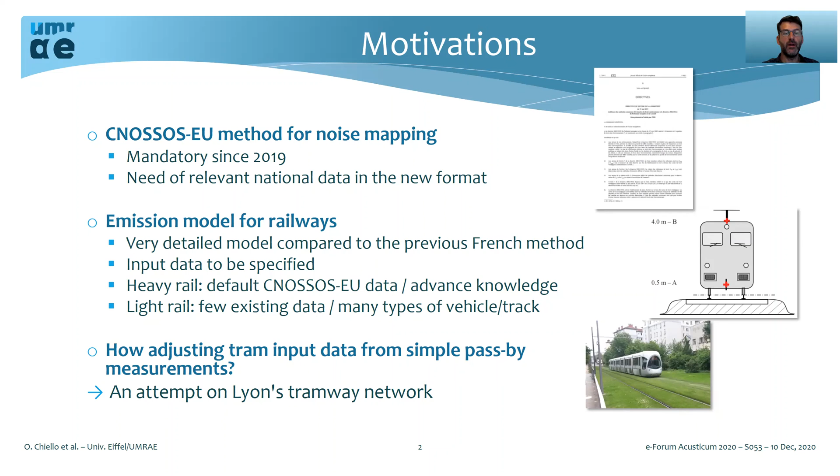The aim of this work is to propose and test a simple method to adjust CNOSSOS input data for tramways based on available pass-by measurements of commercial service vehicles. This first test was carried out on the Lyon tramway network in France.

I will begin my presentation by reminding you of the principles of the CNOSSOS emission model for rail. I will also talk about the available measurements which are used in this test to identify the CNOSSOS input data. I will then detail the proposed identification methods, namely the emission and propagation models used to calculate the pass-by indicators, and the inverse method itself. Finally, I will present the results obtained and the main conclusion.

The first characteristic of the CNOSSOS emission model is its multi-source aspect. Rolling noise, traction noise, and aerodynamic noise are differentiated. Traction noise and aerodynamic noise are characterized by sound power spectra with explicit speed variation: constant for traction noise and proportional to the speed logarithm for aerodynamic noise. Rolling noise is taken into account in more detail, as we'll see later.

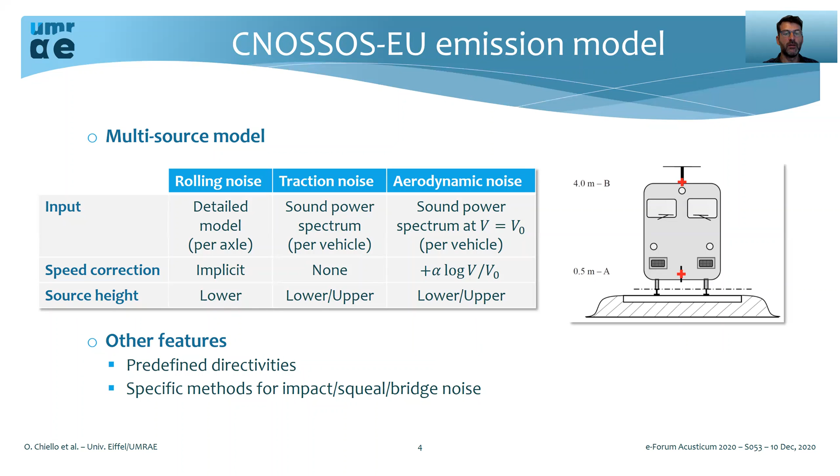The sound powers are then distributed over a homogeneous traffic section at two predefined heights of 0.5 and 4 meters, the distribution depending on the type of the source. The sources also have predefined directivities, and other types of noise can be taken into account in certain situations, such as bridge noise, impact noise, and squeal noise.

Rolling noise is taken into account in a more physical way, as shown in this diagram. A distinction is made between the excitation parameters, namely the wheel and rail roughness spectra as a function of wavelength, and the parameters representing the vibroacoustic efficiency of the structures, namely the vehicle and track transfer functions. These four main input data are necessary to calculate the total power of the rolling noise. It should also be noted that the variation in speed obtained is implicit and is related to the conversion of the wheel-rail roughness spectra, expressed in wavelengths, into frequency spectra.

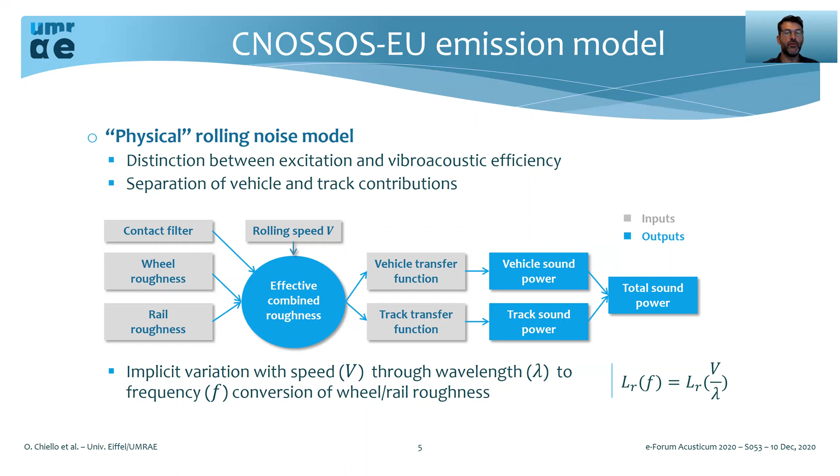The acoustic measurements used for our identification were carried out 2 years ago by the association Acoucité, which is in charge of producing noise maps for Greater Lyon. Pass-by sound levels were measured in accordance with ISO standard on 4 track sections, using 2 microphones placed at 2 different heights. As you can see, the 4 tracks are quite different, whether in terms of rails, supports, or coverings.

The measurements were performed on 2 different types of tramway running at various speeds for a total of about 60 pass-bys. In addition to the acoustic measurements, we were also able to measure rail roughness on the 4 track sections tested, as well as wheel roughness on a small sample of rolling stock. Only the results corresponding to one type of tramway are presented today, which represents about 20 pass-bys.

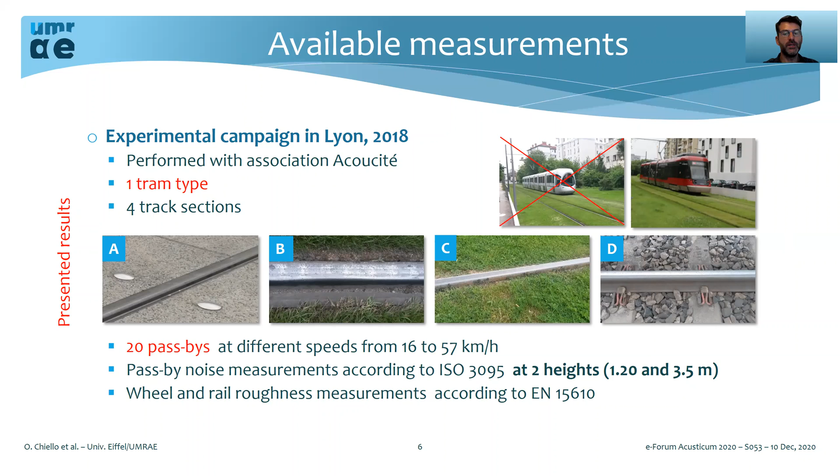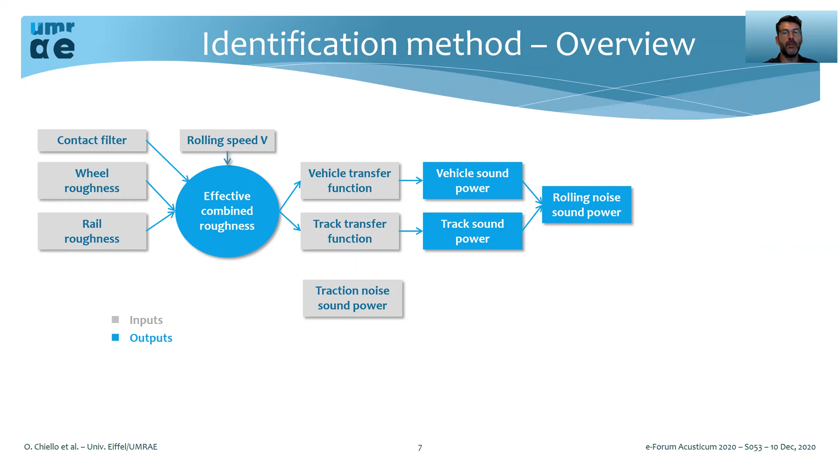The model used for the identification includes an emission part incorporating the CNOSSOS methods for the calculation of the sound powers corresponding to the rolling noise and the traction noise. The directivities and the heights of the sources predefined in CNOSSOS are used. We have also added some information about the longitudinal position of the sources on the train set. The propagation part consists in calculating the different attenuations in order to determine the sound pressure level at the receiving point. The pass-by sound level is then determined by summing the contribution of the sources and integrating over the tram during pass-by.

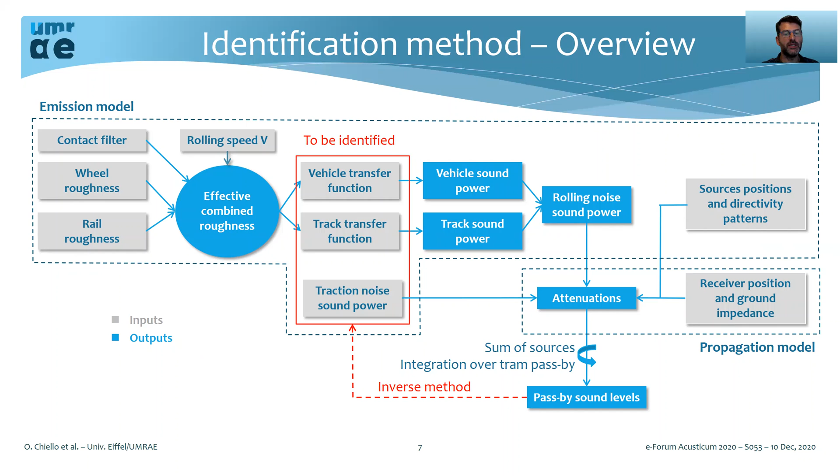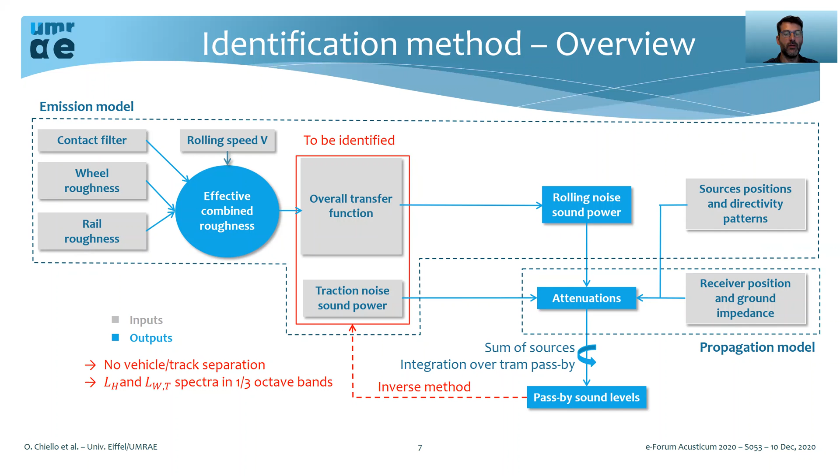An inversion of the model is finally performed to identify the unknown parameters from available measurements. In this first stage, vehicle-track separation is not intended, and one overall transfer function is to be identified. It should also be pointed out that the whole method is carried out in frequency bands so that the two input parameters are spectral.

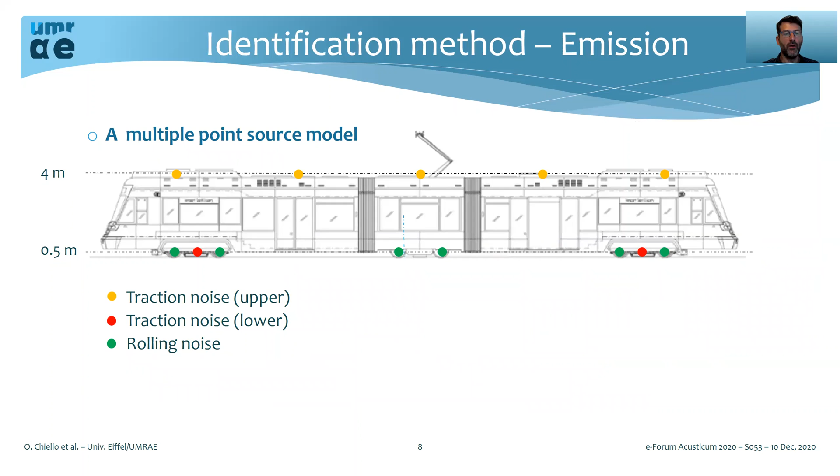So the emission model consists of a set of point sources placed on the train sets as follows. For traction noise, upper sources are uniformly distributed along the train set and lower sources are placed on the motorized bogies. For rolling noise, only lower sources are placed at the wheel sets.

The total sound power level in red, corresponding to the traction noise, is equally distributed between the upper and lower sources and between each source at the same height. The sound power level of each rolling noise source is calculated from the overall transfer function in red and the effective combined wheel rail roughness level, which is determined from the measured roughness level and the contact filter in accordance with the CNOSSOS method. The two parameters in red are to be identified.

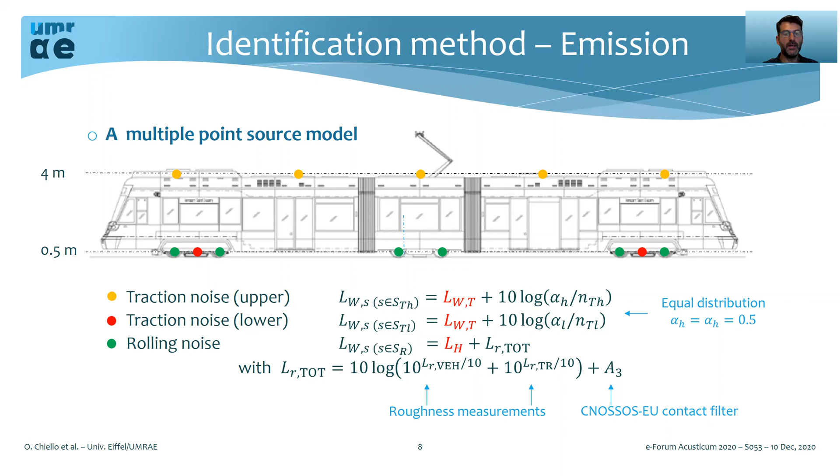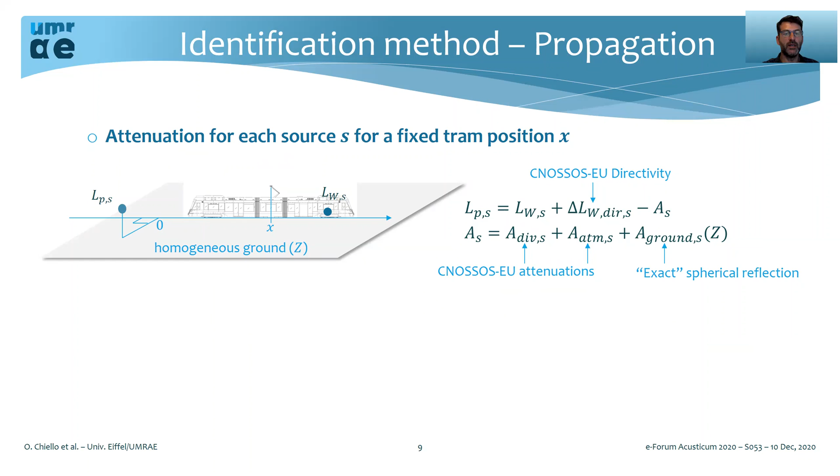The propagation model first consists in calculating for each source and for each position of the train set the sound pressure level at the receiving point from the sound power level of the source, its directivity, and an attenuation term. This term includes the attenuation due to geometrical divergence, the attenuation due to atmospheric absorption, and the attenuation due to ground effect. The first two terms are calculated according to the CNOSSOS method, but the attenuation due to the ground effect is calculated more precisely from the spherical reflection coefficient and the ground impedance. The choice is linked to the fact that we are interested in receiving points relatively close to the sources with homogeneous ground.

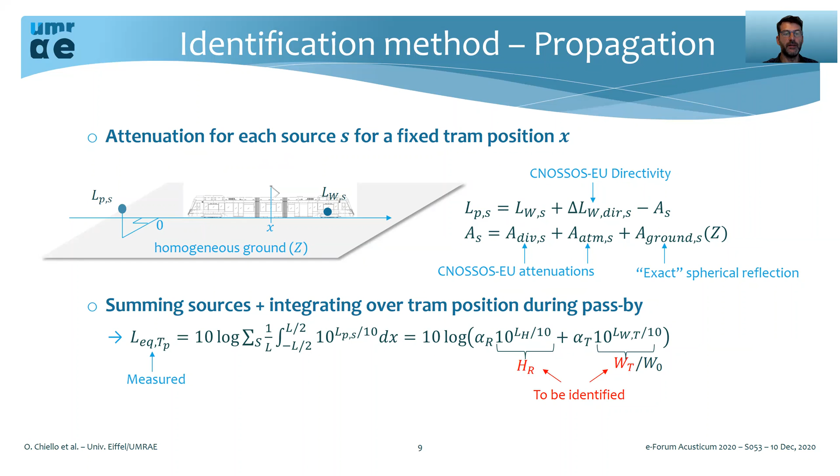The last step consists in summing the contribution of the sources and integrating over the position of the train set during pass-by. The pass-by sound level can then be expressed explicitly as a function of the two parameters to be identified. For one pass-by and one microphone, the previous relationship can be written as a linear relationship between the equivalent quadratic pressure and the two unknown variables. If we combine the results from n different pass-bys obtained on the two microphones for one given track section, we obtain a linear system with 2n equations and two unknowns.

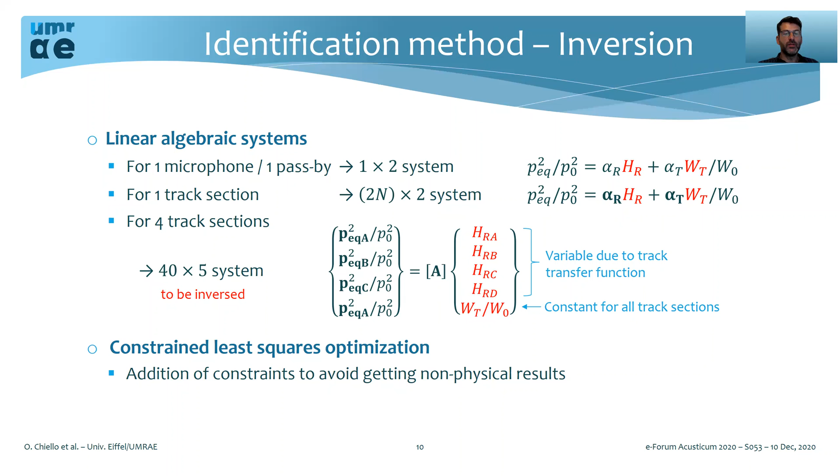The results obtained for the four track sections can also be grouped together. The transfer function has to be identified for each section due to the track differences, but the sound power corresponding to the traction noise is independent of the track. We thus obtain a system with 40 equations and 5 unknowns. This system is inverted using least squares optimization methods, adding some constraints on the unknowns to avoid getting non-physical results.

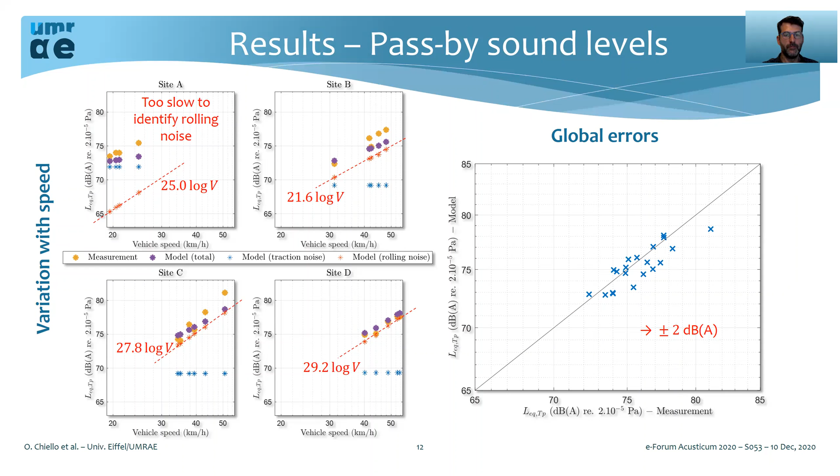Let me now conclude. The aim of this work was to empirically determine the CNOSSOS emission parameters of some trams of the Lyon network. The parameters sought are the power spectrum related to traction noise and the overall transfer function relating to rolling noise. These parameters are determined on the basis of a few measurements carried out on site, pass-by noise levels according to ISO standard, and rail roughness according to European standard. A global identification process is proposed by combining results from sites with different tracks, pass-bys at various speeds, and 2 microphones. Results are satisfactory for a first study with acceptable global errors.

Difficulties may arise in separating sources when the speed range is not sufficiently large. Further work is in progress in order to increase the performance of the inverse method. Results of some vibroacoustic models of tram tracks, combined with track decay rate measurements on site, will also be used in order to separate the track and vehicle contribution to rolling noise in the transfer function.